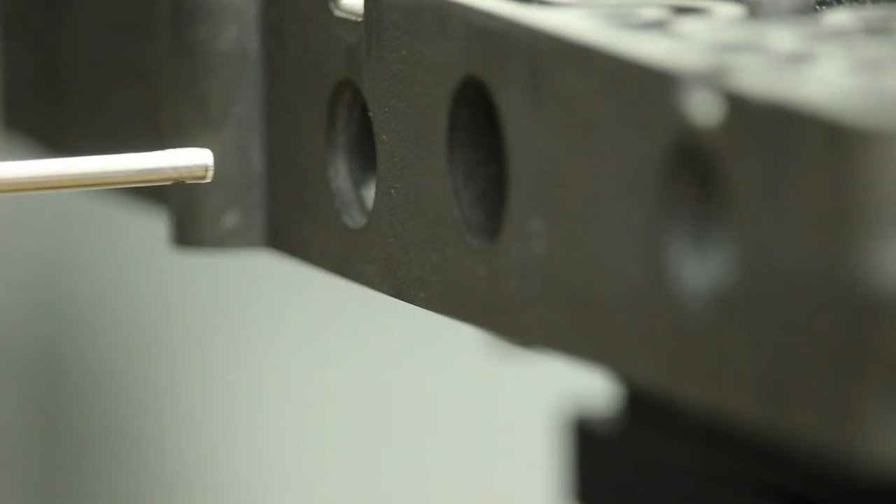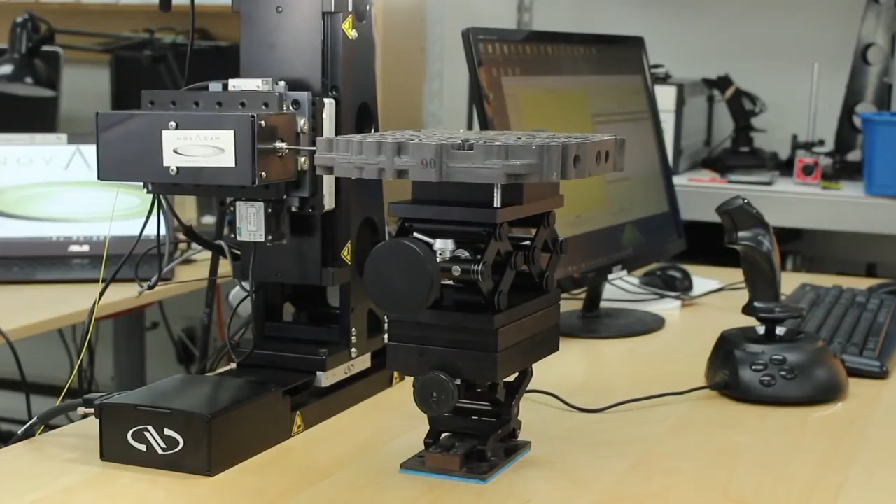When you're responsible for the safety of others, you want to guarantee that each one of your components meets the highest possible standards. At Novacam, we take this to heart. That's why providing inspection tools that meet the challenges of the industry is central to our purpose.

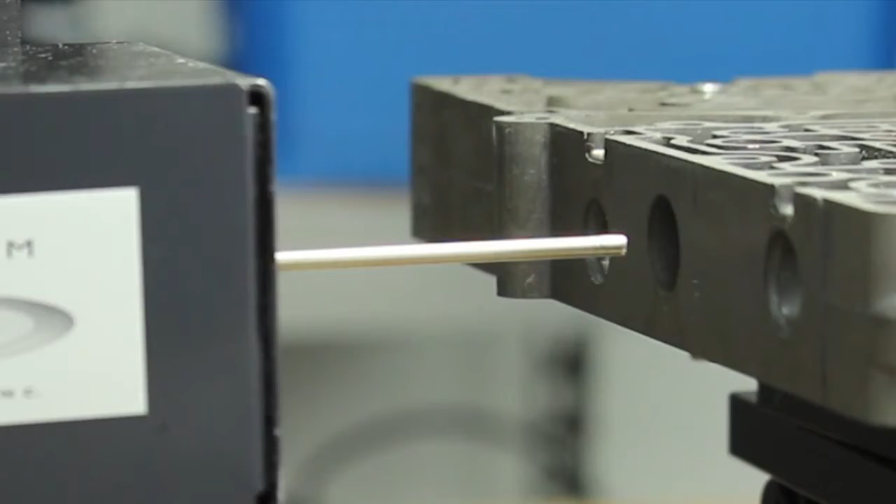Our RS2 is a high-definition metrology probe that provides a non-contact optical inspection with submicron precision. Novacam's probe surpasses other probes because it has the capacity to reach complex cavities in a fully automated digital inspection.

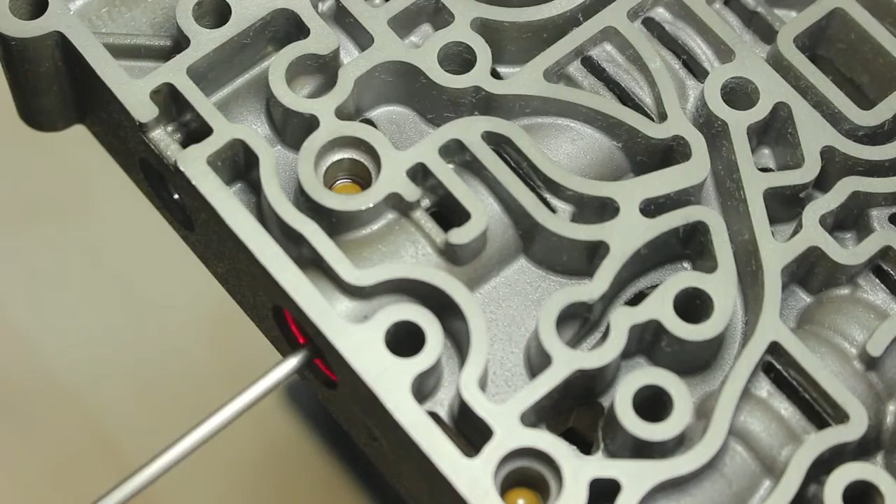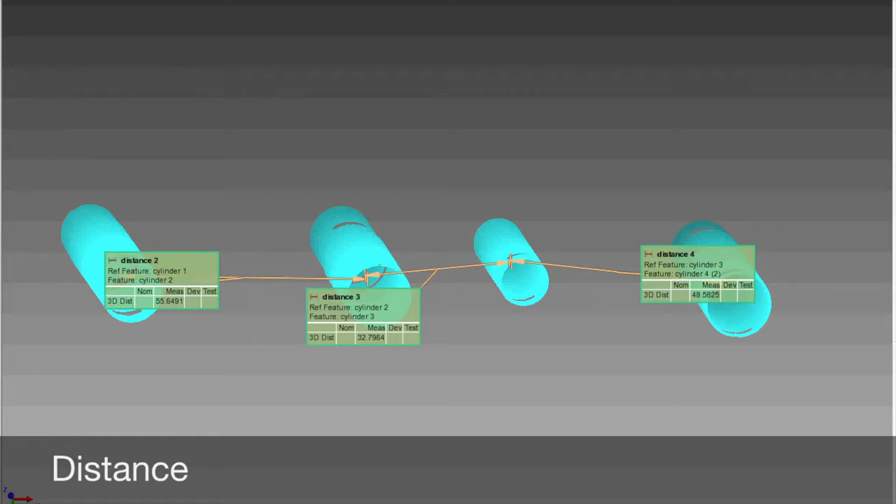Watch how the probe scans this valve body. It's using an optical light beam to reflect off the surface and collect the data necessary to create a 3D interactive model of the inner cylinders. The digital output will provide the exact measurements of distance, as well as position and cylindricity.

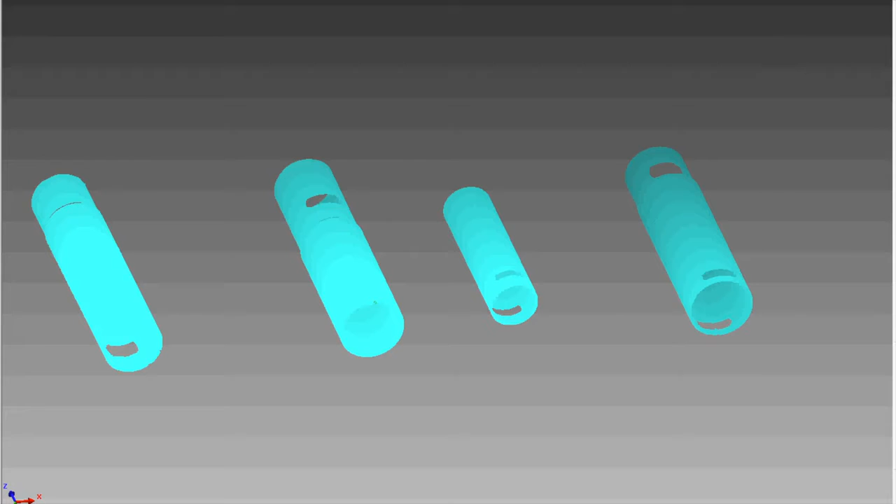It can show any dimensional or surface defects up to the micrometer and measure roughness. You can also get datum alignment and assess the geometric tolerances of all internal features. You can even toggle to the deviation map view, which will highlight the areas that are out of tolerance.

Novacam's RS2 is intended to match your needs in quality assurance. We believe in the importance of high-precision data to guarantee excellence.